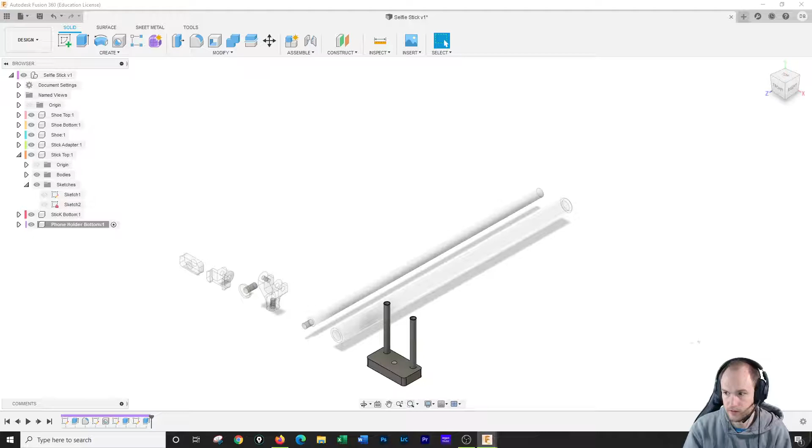So this is the phone holder top. I'm going to create a new component, phone holder top. And I'm going to make a sketch on the top face.

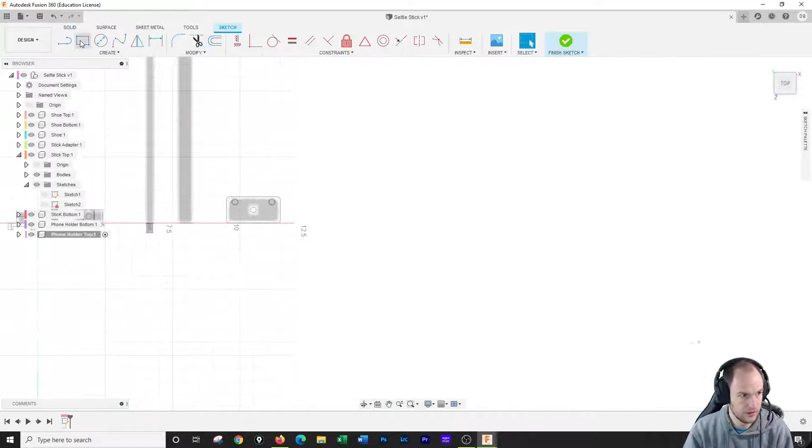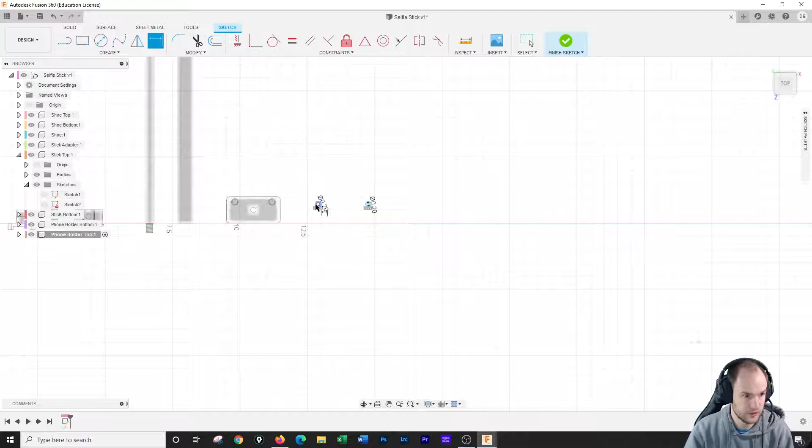I'm going to start with 2 holes that are 0.2, one there and one here. I want these holes to be on the same horizontal, so I'm going to use the horizontal constraint. And I want these 2 holes to be 1.375 apart. Going to hit finish sketch. So far easy.

Okay, next thing, I'm going to extrude both of these 1.5 inches. So far easy.

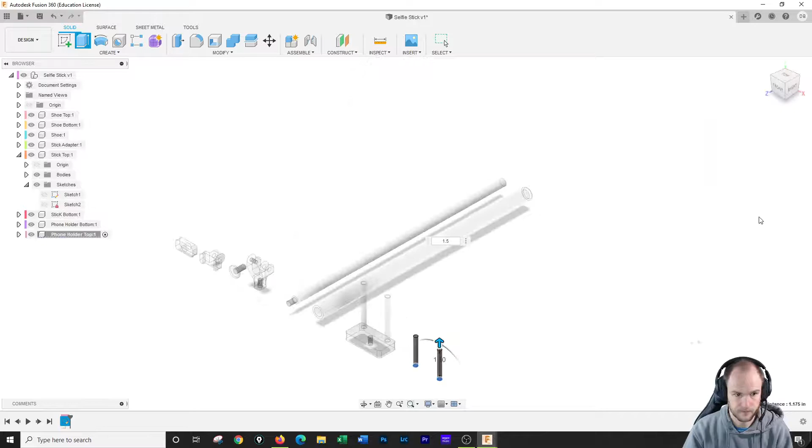So the next part is totally new, and you guys are gonna be like, why do we need to do this at all? And it makes other things later.

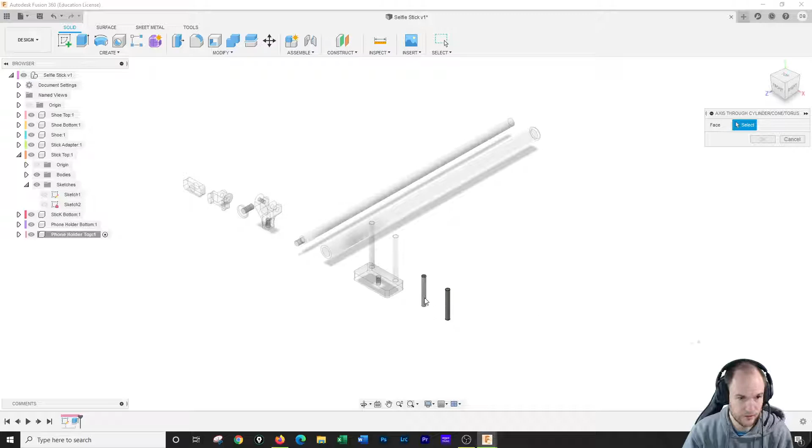So next thing I'm going to do is add an axis through a cylinder, and I'm going to do it on this cylinder. It's only letting me do one at a time, so I have to do it for both. Axis through cylinder. Okay, that's going to help us later.

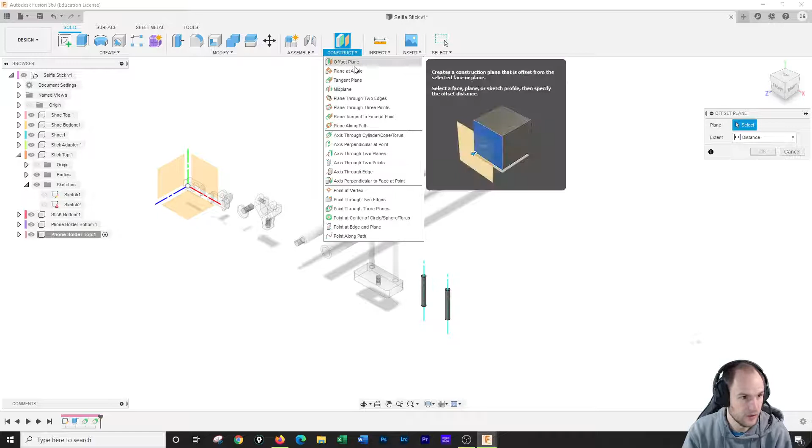As is this. So next I have to do a plane. Which one do I want? Plane at angle on that cylinder line, and I want this to be at 90 degrees to that. So that was plane at angle.

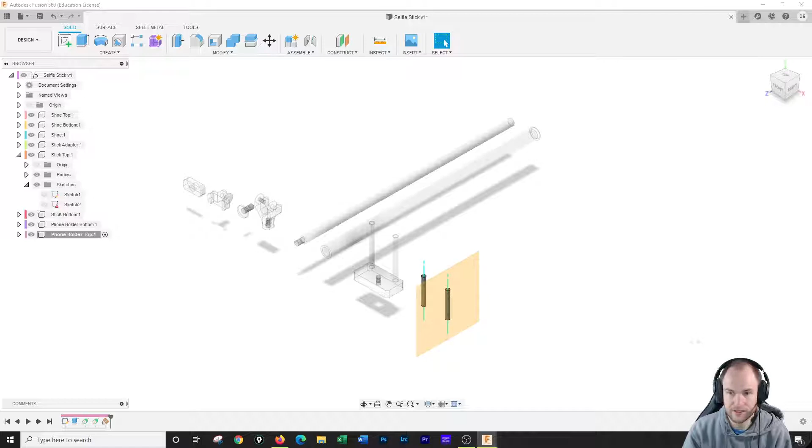Now I'm going to use that plane to make a sketch. So now that I have this plane here, I'm going to make a sketch. I'm actually going to start turning stuff off to finish this one, just to kind of isolate what I'm doing.

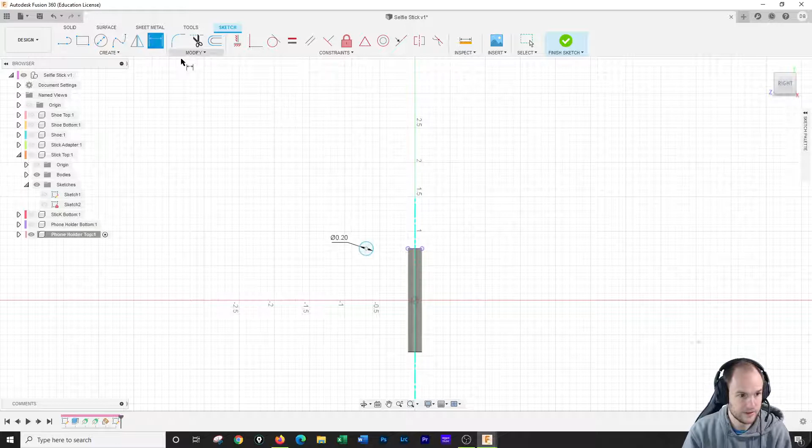And to make this sketch, I am going to do a couple of things. I'm going to project or include this line. I can then project off of it. And I'm going to draw a circle that is a diameter of 0.2, and that has a distance from here to this point of 0.5.

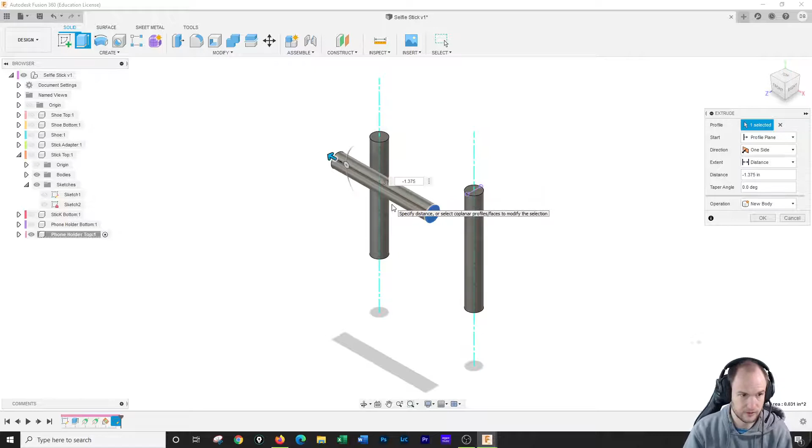I'm going to hit finish sketch. I am then going to extrude said circle negative 1.375. So it looks like it is just floating in space.

So next I'm going to come back over here. I'm going to do plane at an angle, and I'm going to do it at 0 degrees. So I've got the plane at the angle at 0 degrees.

And then I'm going to make a point on the top centers of here. So I'm going to do point at center of circle or sphere on each of these. That's the first one, and then I got to do it again on this one. So I've got a point on each of those.

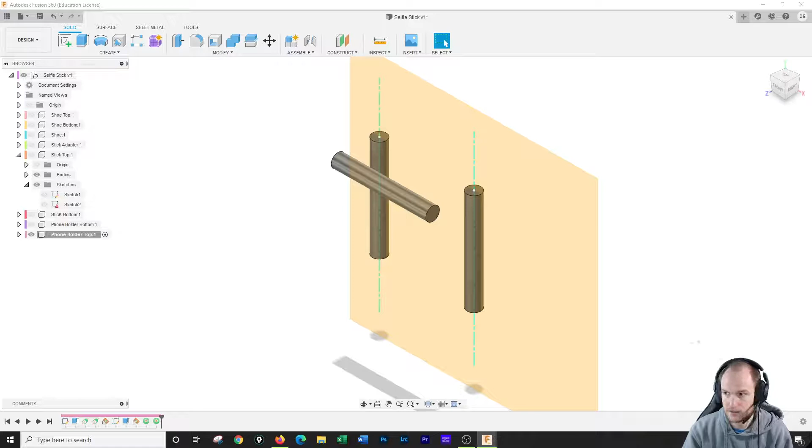Super important stuff, because then I'm going to make a sketch on that plane, and I'm going to use those points I made. So see, I should be able to use those points I made.

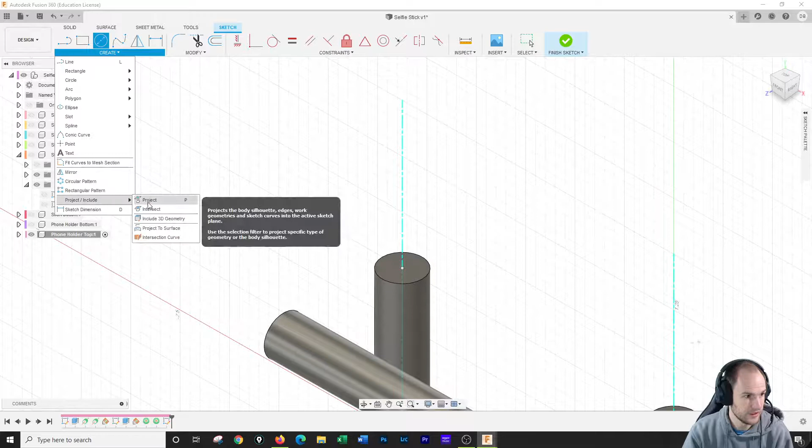So I might have to go and hit project. Now I can project these 2 points, and now I can use these 2 points to make my holes 0.2, and on the other one I will make this one 0.2 as well. So I had to project to use those, but after doing so I was able to easily draw my holes.

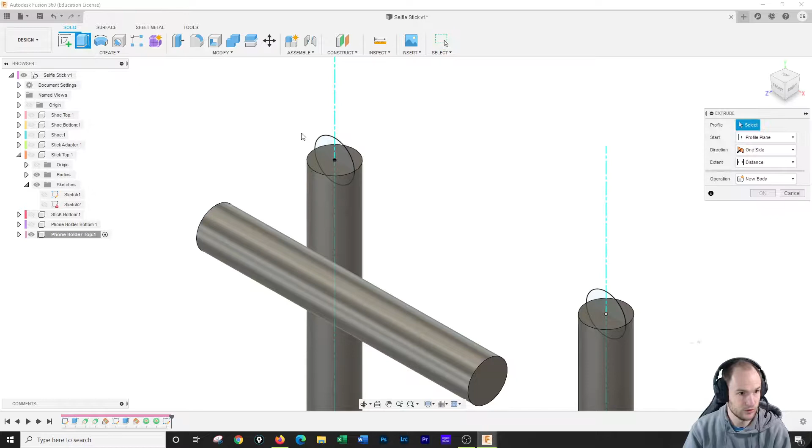Okay, I'm going to extrude both of those holes 0.6. So 1, 2, and I'm going to extrude them 0.6. I'm going to click. I do not want them to cut, I want them to join. Click OK.

All right, now I'm going to do a bunch of lofts. All we're doing for these lofts—loft is a command that brings one face to another face. So all I'm doing for these lofts is selecting loft, selecting one face and the other face, clicking OK.

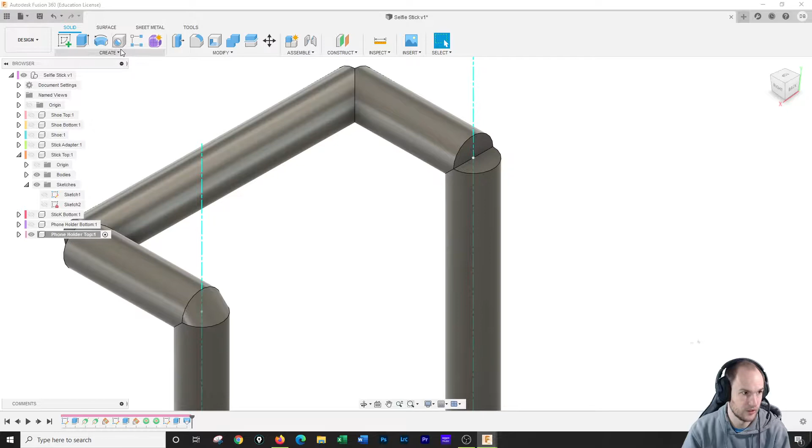And then I will go and do that for multiple faces. Unless I can kind of get a couple of these—I think I can only do one at a time. Like I can't go here to here. No, it'll yell at me. So yeah, you gotta do these one at a time. Order unimportant, but you gotta do this on all 4 of these faces.

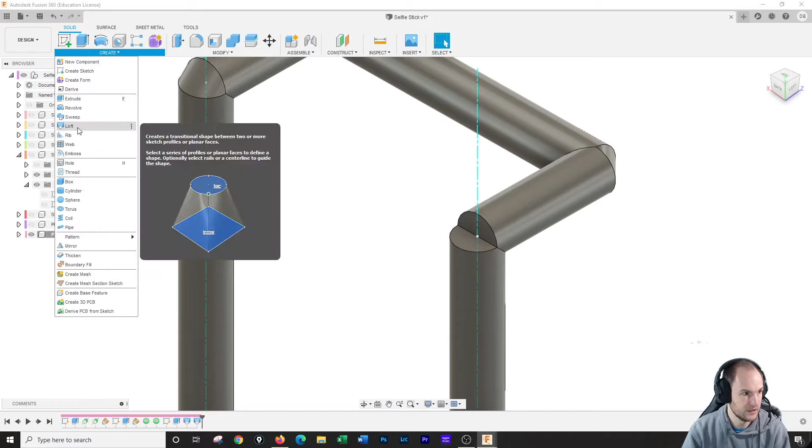Lofting there. Come back to the one I missed. Lofting here. And around to the last one, lofting here.

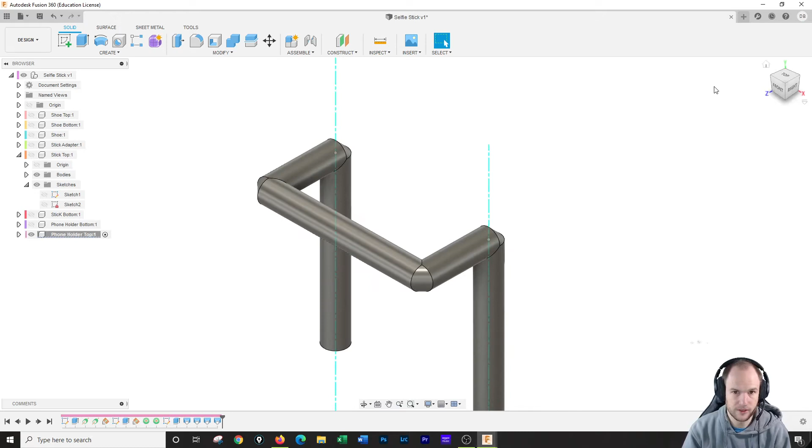All right, and you know what? For me, this is good enough. The one in the curriculum document has a little holder thing up here, but I don't think you really need it. I think this is fine just the way it is. So we're going to say this is it for the bottom piece.